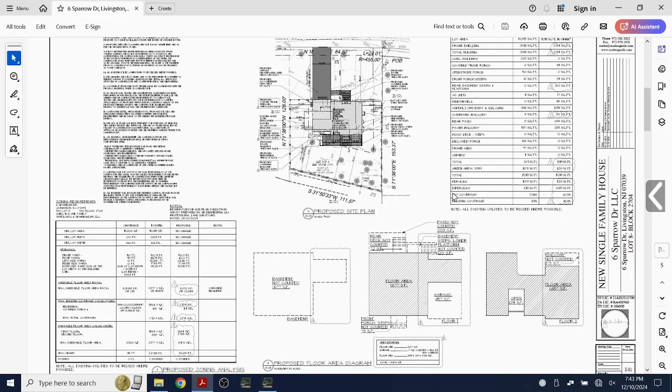The 1.69% is 258 square feet. That's all we're asking for. I'd like to mention that the 258 includes a two-story open foyer, which is counted twice, and the area for the open foyer is 129 square feet. So technically we're only asking for 129 square feet of increase toward the floor area ratio. But Livingston has a very particular ordinance, because anytime you do a grand opening, both floors count, even though there's not a physical floor, as you've heard tonight and at the 6 o'clock session.

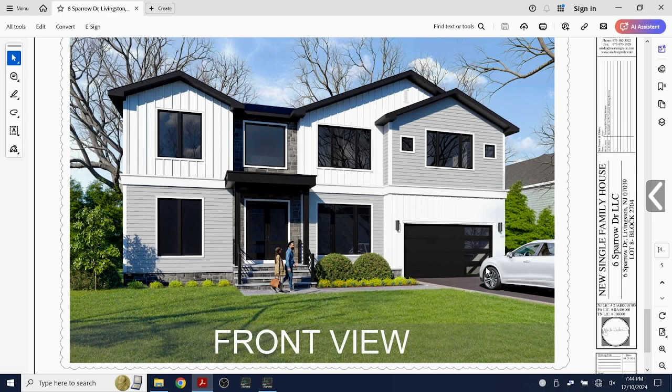And you made changes to the exterior of the property too. Yes, at the last meeting we decided to change the modern character of the building to something that can blend into this neighborhood. So we designed this now, which is the colonial style home with the stone base at the base of the building. We have stone also at the entrance and the foyer. We have horizontal board, James Hardie, and vertical board and batten on some of the walls at the second floor. Based upon the comments of members of the board and the public, we brought this into more of the neighborhood, the colonial aspects that already exist in the neighborhood. Is that correct?

Are these all of the changes from our prior presentation? These are the changes, the square footage changes involve the second floor, we reduced it by 50 square feet. The first floor didn't change much, but that's it. Just the 49 square foot reduction and the outside of the front facade. So these changes we were able to do and keep with the 7 months of planning we've done on this project. Correct.

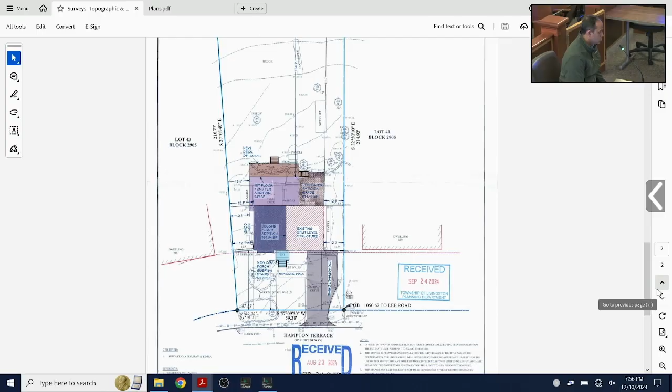Can you describe the changes you're making to the house for us? So we are doing a second floor addition on top of my, it's a split house. On top of the living room, we are doing a second floor addition. Are you expanding the house to either side or to the front? We are expanding the house to the back of the house. And by how much is that? In terms of feet further that we are going, we are going close to 25 feet, I guess.

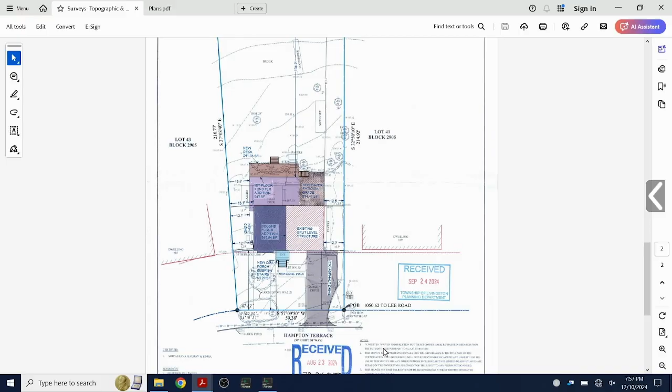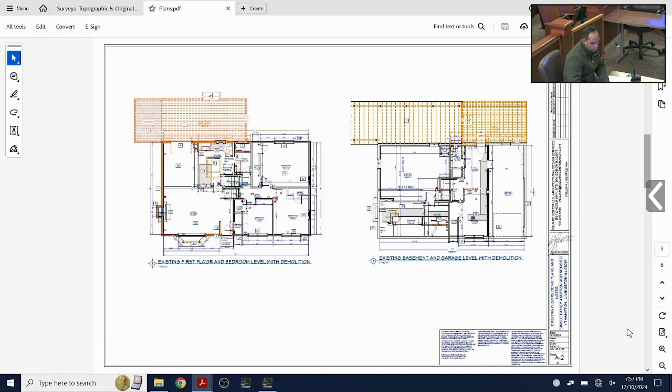His own chart says everything's fine. Yeah, but I'm just trying to figure this out, that's why I was asking. So you're building over the existing house, right? Yeah. Okay, and the variance I'm requesting is for the front yard setback. Right, so it's an existing non-conforming condition. Existing one, correct? Yes. Okay.

Is the addition within the footprint of the existing building, or are you extending it over the footprint? So yes, we are going further back, not around, going back. In which direction? To the back of the house. So there is no other variance, no area, ratio, side? It's only the front yard, which is existing, yes, non-conforming? Yes.

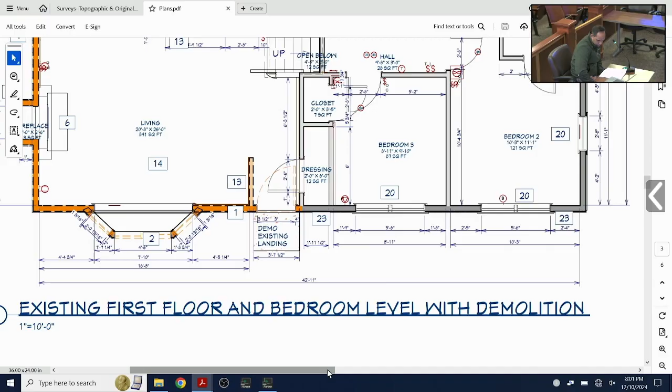Does anybody else on the board have any questions? Does anybody in the public have any questions? Does anybody in the public want to make a statement? Anybody on the board want to make a statement? Does anybody on the board want to make a motion?

So, Mr. Srivastava, you're not asking for any other variance except the front yard, which is existing non-conforming. You're building up and back. Yes. And even the bump out of the window is existing, and you're just going to have a similar window on the second floor. Yes. I've been to your street to check the property, and I see the houses in your neighborhood are redeveloped and bigger than yours. So I think it's a very modest and compliant improvement, except for the existing nonconformities. For that reason, I make a motion to approve.

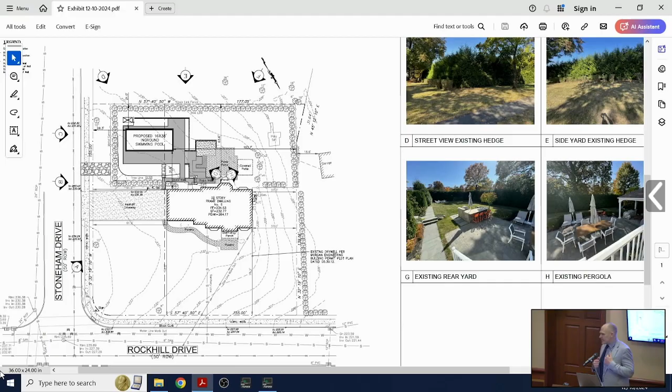I have the denial letter in my bag if you need me to read it off to you. So then you're just coming for the swimming pool setback? Correct, just the front yard setback variance for the swimming pool. Yes, those other two variances we would like to remove, since we're eliminating that screening around the filter.

So we are requesting relief from the front yard setback with respect to the swimming pool, where 60 feet is required and we are proposing 28.3 feet. The pool conforms to the rear and side yard setback requirements. There's an... let me just see, excuse me, I still have testimony here about the fence.

So from a design perspective, the pool in this location works best for the property and for the lot, because it will result in the least amount of disturbance on the property. The pool and patio will require minimal grading in this location. It'll require a small retaining wall, 2 feet or less, to allow for construction of the pool and patio. The patio will function as desired and provide access to the existing paver patio and outdoor kitchen and pavilion area in the same rear yard. No trees are proposed to be removed as a result of this project.

The stormwater will be managed in accordance with township standards. On the site plan, we have several catch basins in and around the proposed pool and pool patio area, which will capture and route all the stormwater to the catch basin on Rockhill Drive. If anybody needs to see that, I could bring up the actual site plan. So as a result of this project and the increased impervious area, there will actually be a net benefit for stormwater management on this property due to these measures we are proposing, such as the catch basins and routing the stormwater away.

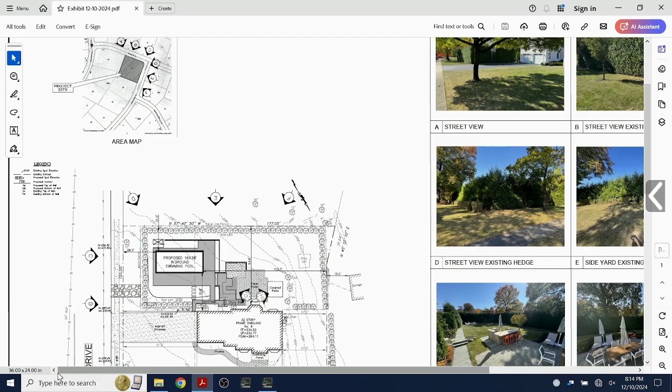So the pool in this location too, like I said, it minimizes disturbance. If we were to push it into the most western corner of the property in a conforming location, the existing paver patio and the masonry outdoor kitchen would all have to be modified and relocated. A substantial amount of soil movement would need to be done to level that western part of the property. We're talking retaining walls in excess of 4 feet, just to bring in all that dirt and level that area to have a patio and pool that match the existing patio. So from a disturbance perspective, the pool in this location works best.

And that is my testimony. I'll take any questions.

I have a question. No, I mean, I get it, I think it's thoughtful. If I read this correctly, the entire property today is screened by these large arborvitaes. So I assume, reading off of this, a degree of those will need to be taken out for the construction to occur and then be put back, is that correct? That's correct, yes. Thank you.

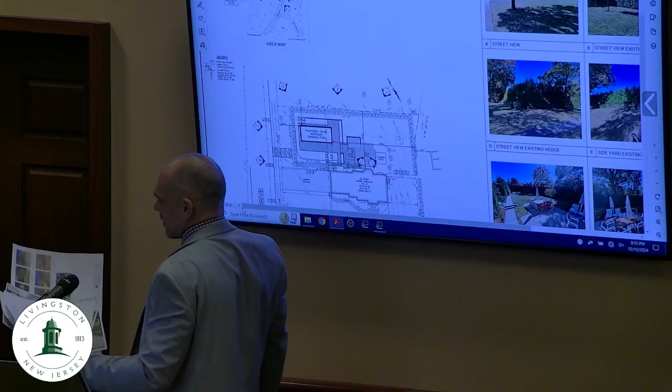Just clarification on the fence. Are you saying both fences? So we were proposing initially a small fence here around to screen the filter equipment. That was the other fence that required the variance. So the pool fence is still on here at 5 feet, asking for the 5 foot? This is an existing fence. We were only requesting a variance for the other one, which was a design feature that the designer sold them on. It was a 5-foot aluminum, modern looking shielding fence, but they decided it wasn't necessary.

Okay, and the existing fencing is adequate to protect for a swimming pool, right? It will be pool compliant. I don't believe the chain link fence in the rear has the required 2-inch spacing, so it's just going to have to be modified to have the non-climbing fence. But the fence will stay in its location and it will be conforming to the International Swimming Pool Code.

Anybody else have any questions? So this little box here, it's pool machinery? This one here? Yeah, that's the filter pad, yes. And there is a neighbor behind, on that side of the property, right? There's a neighbor, yes, a house there. Is it possible to move the machinery on the other side of the pool? Or this, on this side here? Yeah?

It can happen, I mean, anything can happen. This is the application, this is the design that we're proposing tonight.

The filter pad uses variable frequency drive pumps. They're not as noisy as everyone thinks, or as history tells us. I don't see it being a nuisance, especially with as thick of a screen as that, which can shield and dampen any noise. The green screen is absolutely impressive, great job with it.

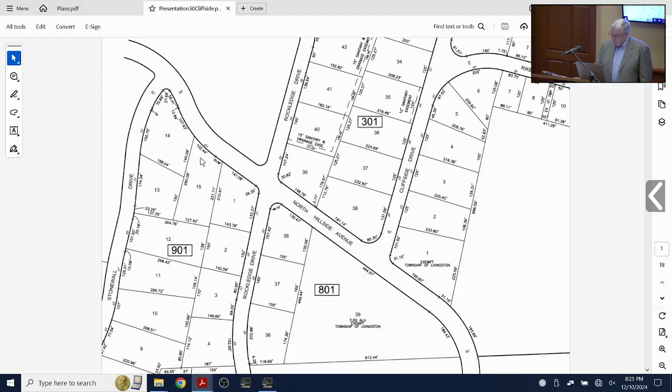We do have a correction to make. The habitable floor area that we were pursuing the D4 variance for was 5,513 square feet. After more careful measurements, it's 5,397 — a little smaller than we started. But it should be noted that it's actually going to be lower than that.

It's a bi-level house. The lowest level is a basement. It meets the definition of a basement — it's below grade at least at one point. Actually, the whole front of the house would, in other circumstances, make it a one-story house. In fact, bi-levels originally were called raised ranches.

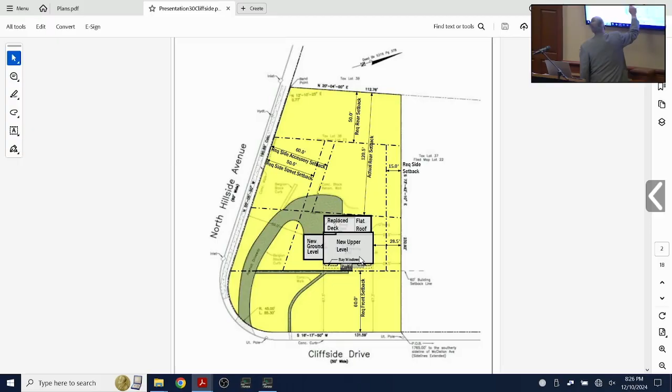It's a concrete ground floor, and once we add the second floor, our intention is to add a second floor to the main portion of the house and above the garage. The garage is on this side, and that's the main portion of the house. There's also a two-level deck in the back that's going to be leveled off.

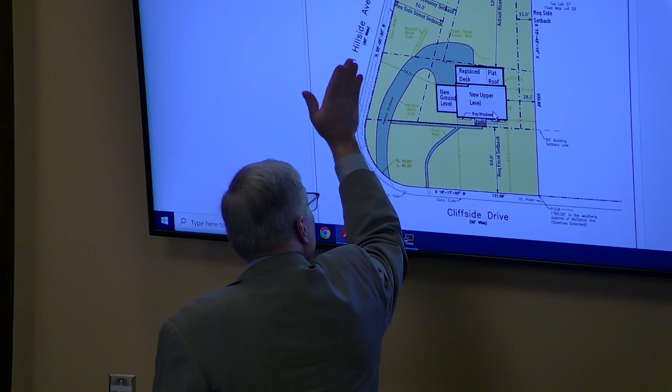A little bit about the property: there are some steep slopes, mostly up here, and some coming sideways here. There's a drainage swale here and a berm that protects the neighbors, so it's pretty well drained.

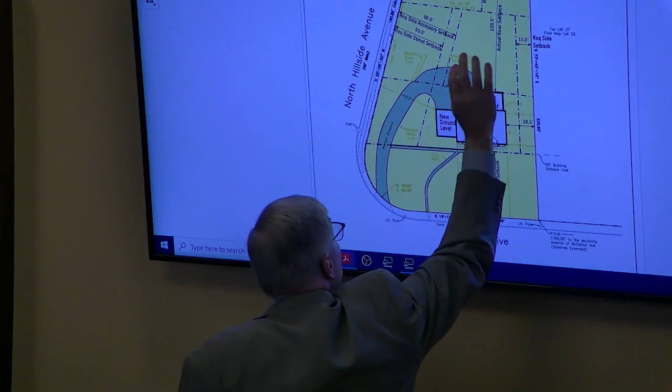The driveway takes up a lot of the back, and this is coming in close to level. Then the grade keeps increasing along here, up the back, and this whole area is 9 feet below ground level.

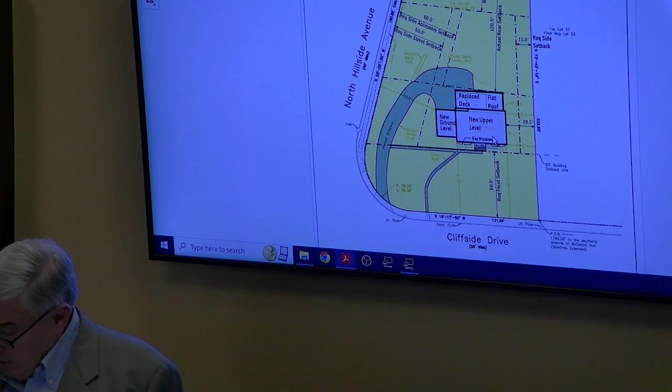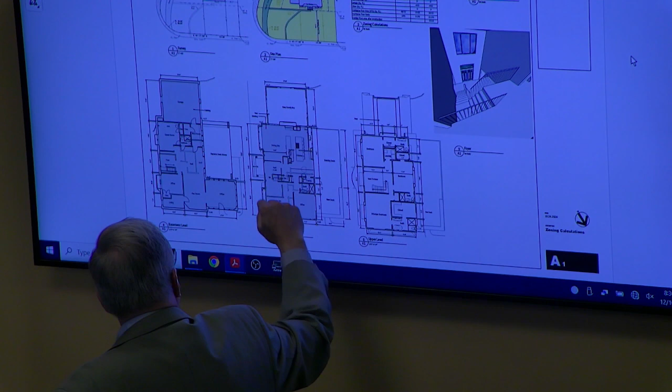The house itself — currently this is the proposed basement. It did have a small storage area here for yard equipment, but this whole area is going to be revised. A family room is going in above the garage. Other than that, it's the same square footage as the existing second floor, except for 2 bay windows and a bit of an overhang towards the back. The second floor has 3 bedrooms with en-suites, a master bath, and some closets.

The exterior — this is the exterior of the building. I'm going to go into more detail a little bit later, but actually I'm going to go in now.

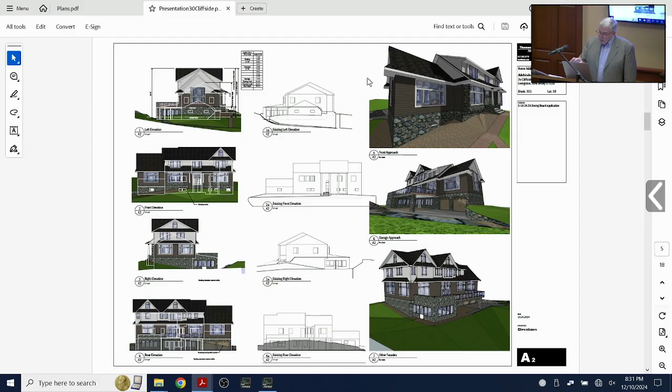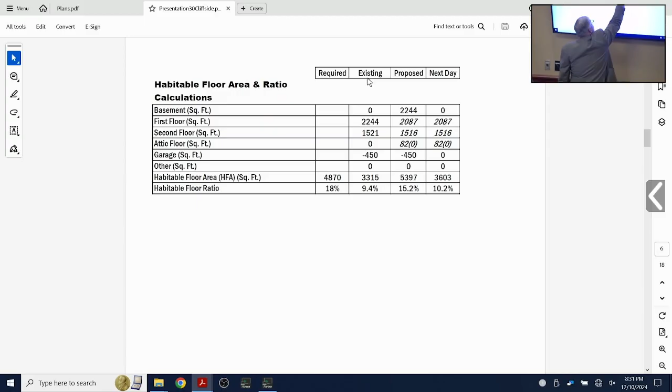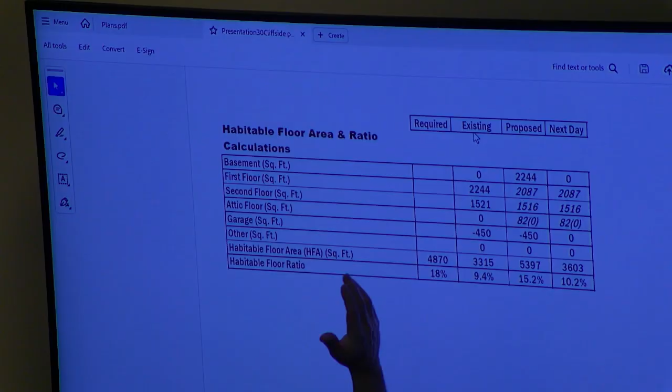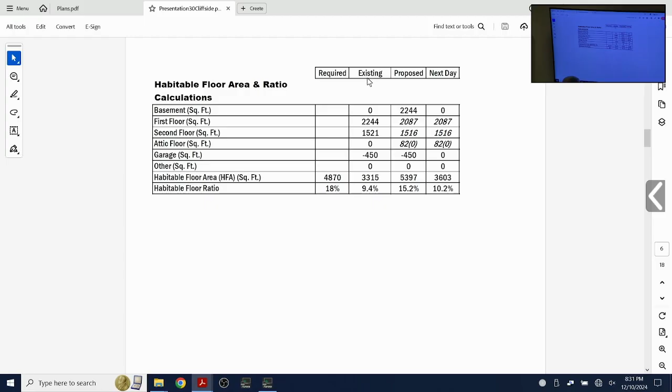These are the habitable floor areas. Just to repeat, that's the existing basement going to a basement, the first floor going to ground floor, and a new upper floor. The attic at its peak is 6'10", which translates to 82 square feet below the 6'10" level — well under the 1,500 square feet of the floor below. So it's nothing.

Mr. Singer, if you don't mind, use the microphone for me. Okay.

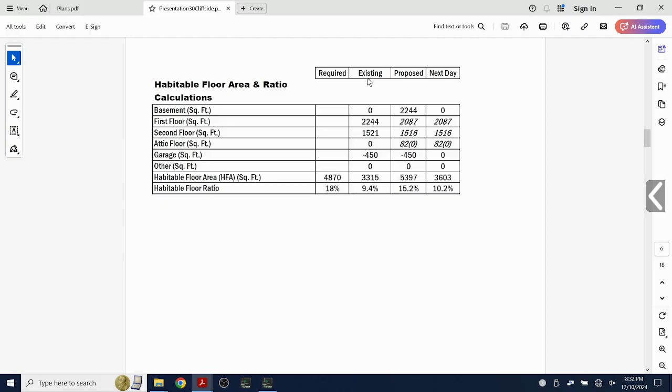And again, the ultimate square footage ends up being 10% of the habitable floor area ratio and 3,603 square feet.

Just another point here for the board members. The proposed in the last table goes higher for the variance. That's why we are requesting the variance. But after the house is built, when the basement is considered, we will be conforming. That was the point he was trying to make.

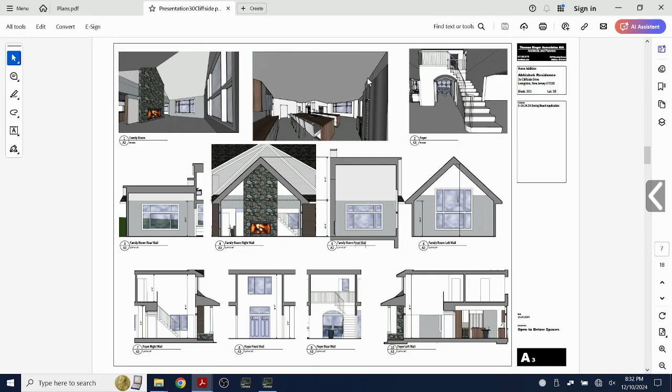So this drawing just describes the exclusions. The 2-story family room is under the limits, 10 feet at the edges, so that's considered just part of the ground floor. However, the foyer, which is 2 stories high, is counted twice.

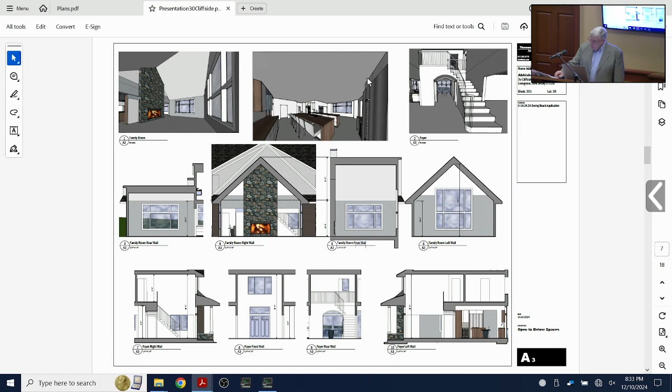So that's where we are with area. Now, height.

This is a unique site and condition because the grade line comes down to the garage and then ends up going back up. So on the low side of the house, it's actually higher than the high side of the hill. Because of that, and because the back of the house is more articulate than the front, there are 9 spot elevations that were used to determine the height.

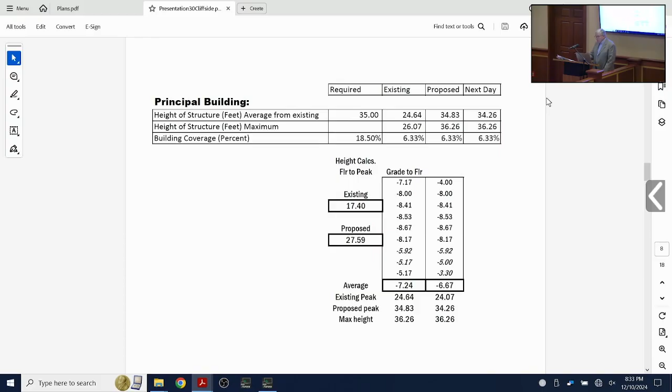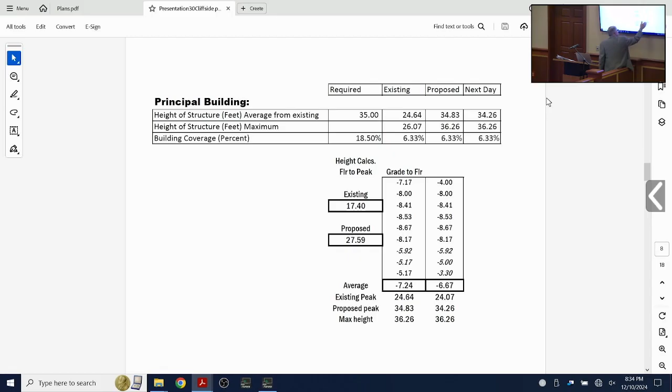Right here, actually. There are nine height calculations that we use to get the proposed peak, which is 34.83. However, we are putting something in front that changes grades a little bit, which gets about 7 inches less than the 34.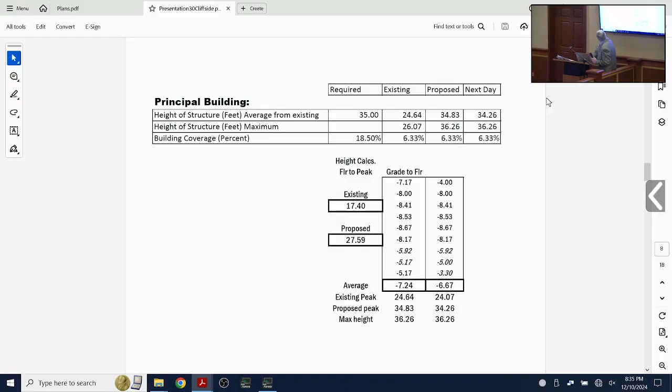Now, of those 9 points, of the 9 points, 3 of them are at the front of the house, and 6 of them are in the back. The back, which is the lowest part of the site, gets all the weight, while the 3 points in the front only get a little bit.

As a result, if you just took the 3 points in front, the overall height of the building would be 33 feet, or with the landscaping we're proposing, 31.43. The overall slope of the site is a 10% grade between the front and the back. If you were to extrapolate that line, it would end up being about 31.6 feet tall relative to natural grade before anything was built in the 1940s.

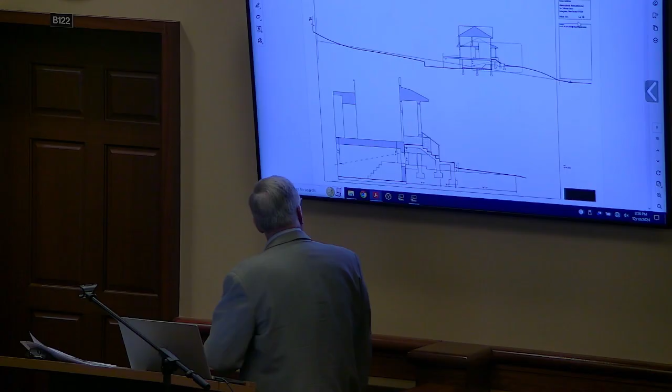The work we're doing in front: currently, this is the elevation of the front stoop and the front step. We are slightly increasing the grade here to 5%, using some structural walls to get up halfway the stairs to the first floor. So you'll be entering at the first floor. Grade is right here. That's fill underneath the stair, but this will be the final grade. There's a 16-inch seat right here, and a 1 foot 2 drop to the garden.

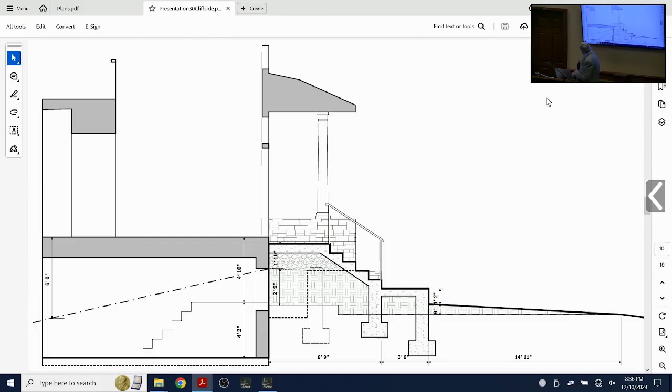That's just an enlargement. In the interest of time, since there are other hearings also planned, I'll request: essentially the variance requested is for use, for the square footage. The plans already presented to the board members elaborate what we are doing: converting the bi-level house, the ground floor being the basement, and adding a new floor on top, which will give us 3 ensuite rooms. The overall square footage, including the basement, is about 5,300 square feet. But if we count it after the house is constructed, with the ground floor as the basement, it'll be conforming at 3,800 square feet.

That was my question, actually. What is the style of the house? So you said it's a bi-level, and after it's redeveloped, it will be a colonial.

So the 2,240 that you said is the basement area being counted right now, will be basement then, so then it'll be conforming. Correct, yes. Okay, so what we were told, the denial was that because it will be non-conforming while it's being constructed, that's why we have to apply for the variance, for the use variance.

And there are no setbacks. The plot size is pretty big across, and we have ample space around on all 3 sides. It's a corner house. Right, that's what I was thinking. Why were we talking about the 2,240 basement? Okay, that clarifies a lot.

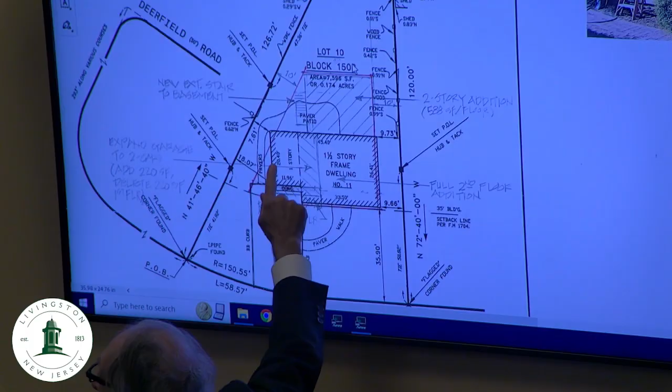So the back corner of the garage is existing, non-conforming. We're putting on a second floor over the garage and in the back as well. This is a first and second floor addition, and this is a second floor addition. We're expanding the garage, setting back the front setback a little bit to create more of a two-car garage.

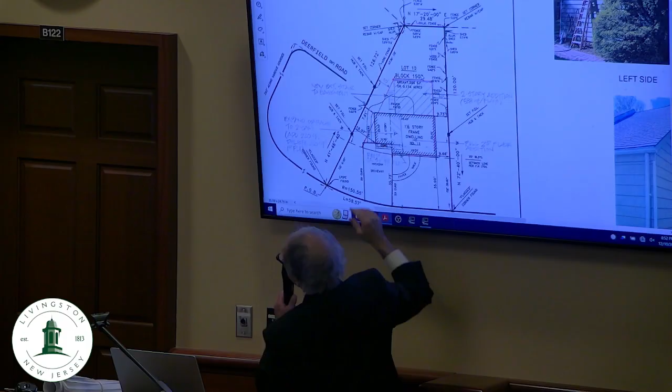The back corner on the second floor is actually a balcony. It's an open space, but for structural and visual reasons, even though it's unenclosed, it needs a variance because of the roof. If we didn't put a roof on it, it wouldn't need a variance because the addition would be literally in that back corner. So we're requesting that little corner for the addition.

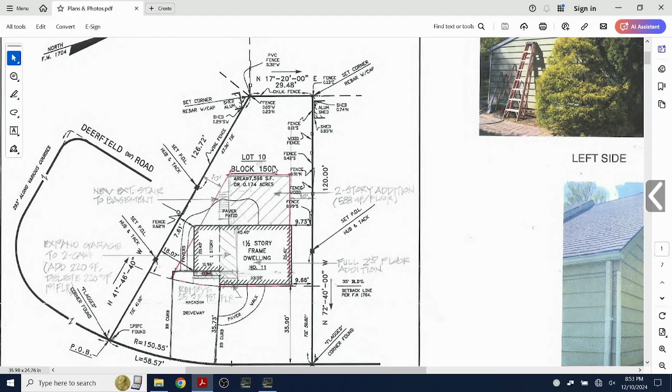Finally, the habitable floor area is required to be 30%, and it's allowed to be 3,200 square feet, 3,220, but right now it's required to be 30%, and we're at 35.5%. So we're requesting a variance of 5.5% over, which is still under the 3,200 square feet, similar to a previous applicant tonight. So those are the three applications, the three requirements.

Question, so the total square footage of the new home is 2683. Am I reading that correctly? Let me go to the chart. Yes, 2683.5. Okay, thank you.

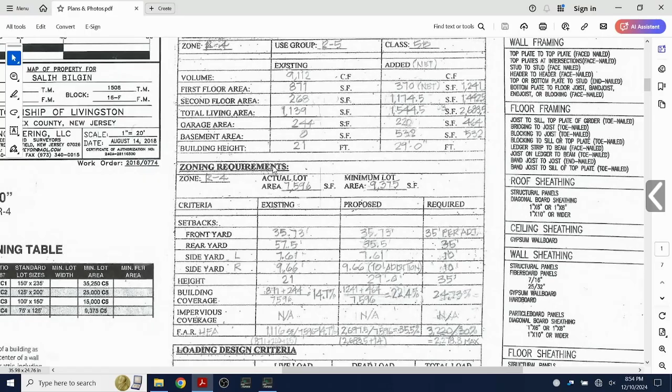For some of these variances, can you describe the hardship for us that you're up against? Well, this is an existing cape, so it's a 1.5-story house with a single car.

They've been living in it for 15 years, is that right, Sal? Yeah, since 2008. Right, and they're still continuing to live in it. One of their daughters is going to be in the upstairs room. Right now, she's in the attic, but she'll have her own room in this corner, the corner of that little corner of the garage, the upstairs. We created a suite for her. That's what she wanted, the balcony. And then that's her favorite part, the balcony.

The way we did it, we created this penthouse suite upstairs, especially at COVID time. It helped her to boost her morale. Upstairs was hers, and in the 2 rooms downstairs, we took the small room. The room in the front, in the Cape Cod, became like the guest room because my mother-in-law was visiting us. She got stuck in COVID with us over here. That was the fun part. But it was okay, we survived all together. But it helped my daughter a lot, she called that penthouse suite upstairs, and we did it great. You should have come and see, she was able to get her friends over there because that's the largest room in the house. It's okay.

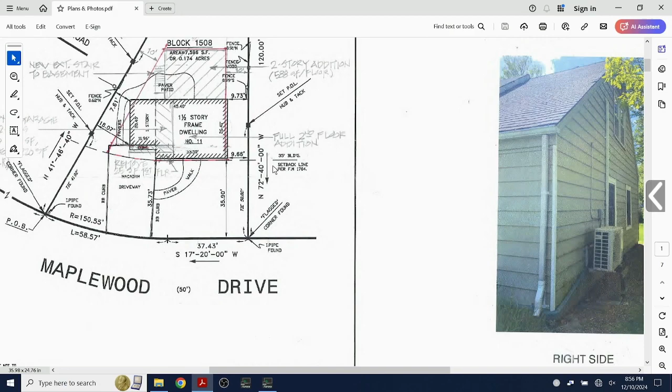The undue hardship is really the space itself is just too tight for the family, because there's really no real second floor. It's all eaves, and they needed space for like a family room and to live in it. The other houses around this one have all been upsized. They're not McMansions, this one's the same width. It's not going to take over the property. As a matter of fact, the garage is set back a little further, so I think that's probably a plus. So it's not a snout house.

And you say you're building straight up? Yeah, and within the setback for the addition. We had 2 options. We wanted to save and build in our own town. We like our town. Yes, taxes are high, this, that, but we love this town. Even though my daughter graduated, I don't care about the school system, I don't need the school system, but I need this town. I need these people, I like to walk in this street. So that's why I would like to invest in my town instead of leaving my town.

That's what it is. So this is also an undersized lot. If it was a regular R4, you wouldn't require the floor area ratio variance, right? Yeah, the real problem is the left side yard is at an acute angle, and that creates issues. If it was perhaps straighter, it might not have even been anything to discuss. Undersized lot, you're building directly over the existing house. Yes. Right.

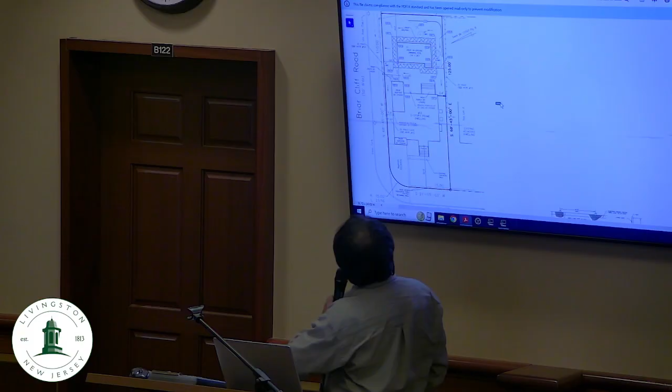Okay, so I guess I get the mic. So we are proposing a 14 by 28 in-ground swimming pool, which is a pretty modest size, and we will need a variance for the side setback on this side. 20 feet is required, we're proposing 10 feet. For the front side setback, also a 20-foot requirement, we're proposing 12 feet.

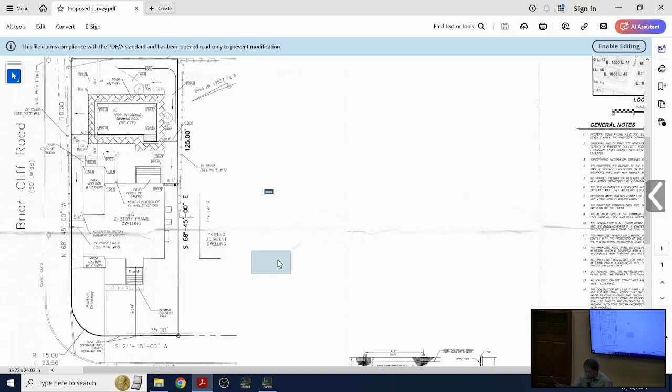We also require a variance for the pool rear yard coverage of 14.7%. So this property is an existing undersized lot. In terms of area, the requirement is 9,375 square feet, and we have 6,202 square feet. The lot width is also existing non-conforming; it's existing 50 feet wide and requires 75 feet.

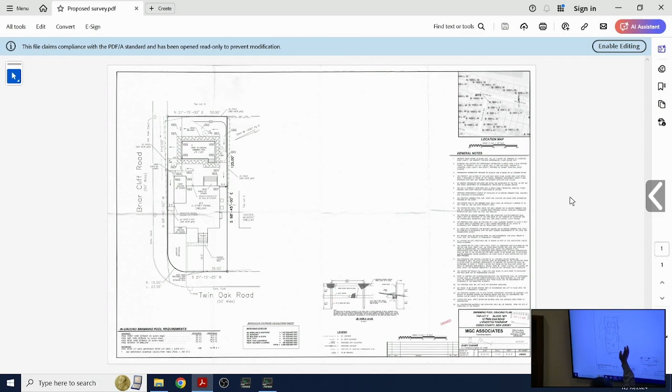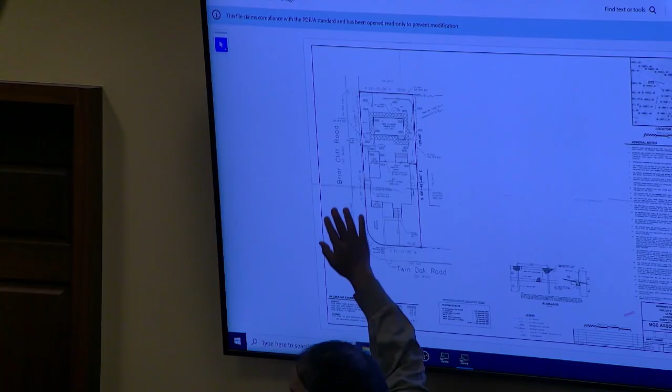So if we were going to put this pool in a conforming lot, we would not actually need any of these variances. Right now, the topography drains from the upper right down to the road, so there will be no impact on the neighbor, and it's going to continue to flow in the same direction. We have a 6-foot fence on the right, a 6-foot fence on the rear, and a 4-foot fence on Briar Cliff Road. Our property is also about 8 to 10 feet higher than Briar Cliff Road, so it's kind of like a natural buffer screening it from the road out there. Again, because of the unique size of the property, we're requesting these variances.

Does anybody on the board have any questions for this witness?

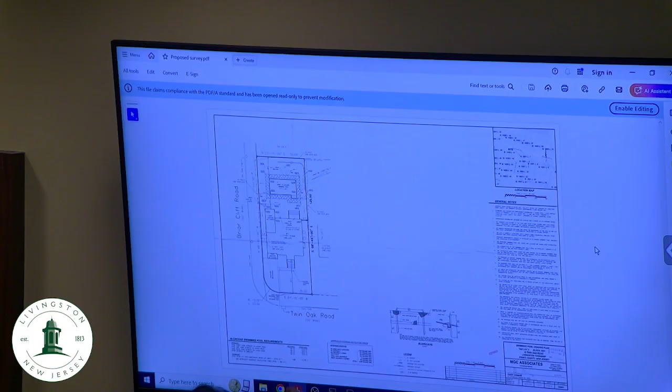Where does the pool equipment, the machine, go? We were planning to put it right here, on the side. There's a 6-foot fence here already, so it will already be screened from the neighbor.

It's not labeled. So I have a question - the photos we received, the house doesn't look like this anymore, right? It's under construction, correct, so every day it's going to look different. And it's hard to see in the back because there's materials there now, but it's not a particularly large backyard.

I understand the need to want a pool, I totally get it, it's a small backyard. Why did you just not choose to make a smaller pool and not come in front of the board? What's the real hardship? Well, no matter what size, we would have a setback issue. It's 20 feet, but that is on the smaller side. Anything smaller just wouldn't make sense.

The pool that we're proposing is a pretty small pool to begin with. And you can't move the fence because it's right at the top of where the hill is going down, so you can't move it out anymore.

That's our property line, even though we have additional space beyond the survey - that's not ours. The property line ends where the fence is. So we do have additional space beyond the survey, that's most likely the town's, but it's not our property. Right, and it's not usable anyway.

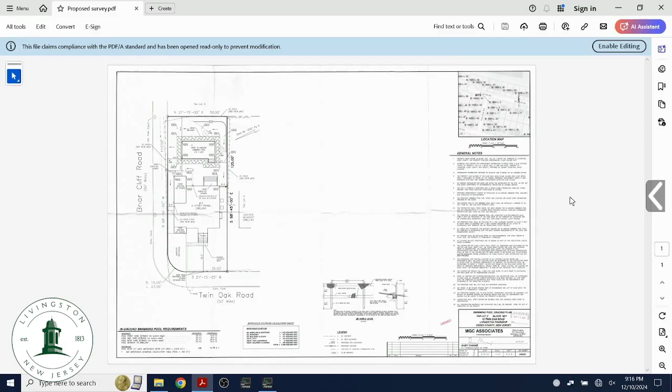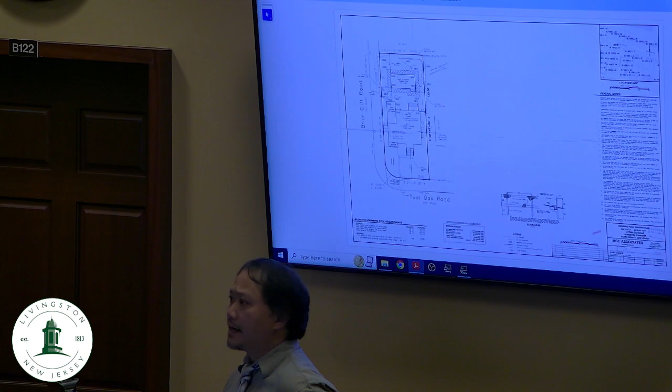And I guess 6 to 8 foot as they come? Yeah, 6 feet, 6 feet minimum. 5 foot spacing on that whole row, they grow quickly, they grow fast, the green giants.

Arborvitaes on one side will be good for privacy, but on the back and the other side where the neighbors are, there's already a 6-foot high fence. There's a fence on the back and on the side where our only neighbor is. The fence in the back is actually their front yard, since it's a corner lot, not their backyard, but there's a 6-foot fence there.

But I still feel a few greens over there would help. It will make your backyard look prettier, and also benefit the neighbors on the side and the back. It'll be a green wall, since the trees will be taller than the fence, so it'll be nicer from an aesthetic point of view.

So then we're putting them on all 3 sides? Is that what I'm hearing? Did you say 3 sides or 2 sides? They're saying 3, I think. So the front, the side, and the back, right? Right, definitely the front and the side. I think everyone's nodding on all 3 sides. So all 3 sides, green giant arborvitae, 6 foot minimum height, 5 foot spacing?

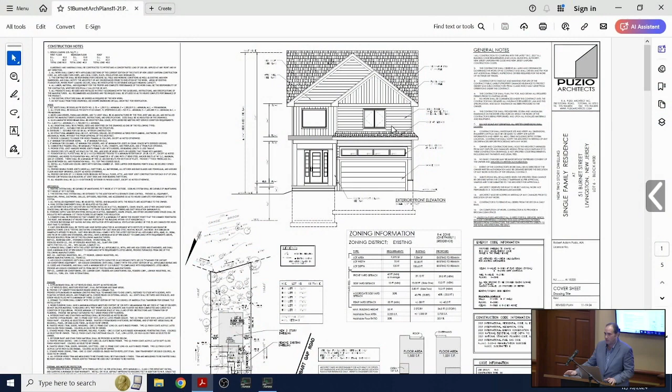Certainly. First, I'll go through the architectural plans, highlighting the proposed floor plans and elevations for the single-family dwelling. As Mr. Posada indicated, it will replace an existing dwelling. Here you have the front facade, front entry, 2-car garage, windows for the bedroom program that is on the second floor.

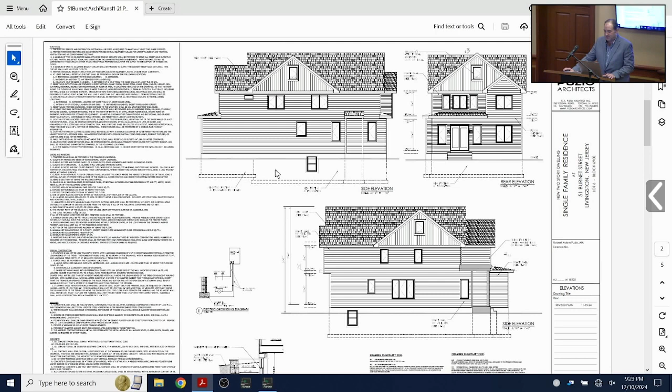Here are the other 3 elevations. You have the 2 side elevations with ample fenestration, so you're not dealing with any blank wall situation. Similar to the rear elevation where you have windows for the various rooms as well as access to the rear yard. I would like to note that the siding material is high-quality HardiePlank siding.

It is not vinyl, so that will be a very attractive facade. Moving on to the floor plans, here you have the basement plan where the majority of the basement is an open recreation room, as well as a small bedroom and bathroom in the basement. Moving to the first floor, you have an attached two-car garage, as well as an open kitchen, dining, and family room area. There's additionally a guest room with an ensuite bathroom. I would like to note that this is a pretty modest-sized dwelling. The first floor living space plan is approximately 600 square feet for the family room and guest room, and then the kitchen and the mudroom balances out the habitable floor area of that floor.

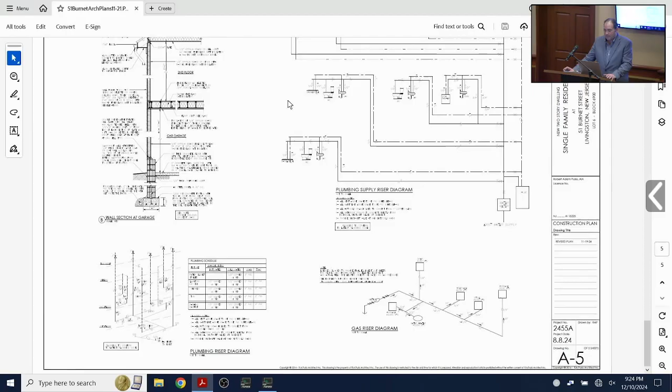I'd like to highlight that the only access to the attic is through the pull-down stair in the second floor hallway. With relation to this staircase here, this is an open foyer, so there's no access for the stairs to get to the attic. So everything will be through the pull-down stair in the hallway. And therefore, the attic cannot be habitable? The attic will not be habitable. Thank you.

So that concludes the program for the proposed dwelling.

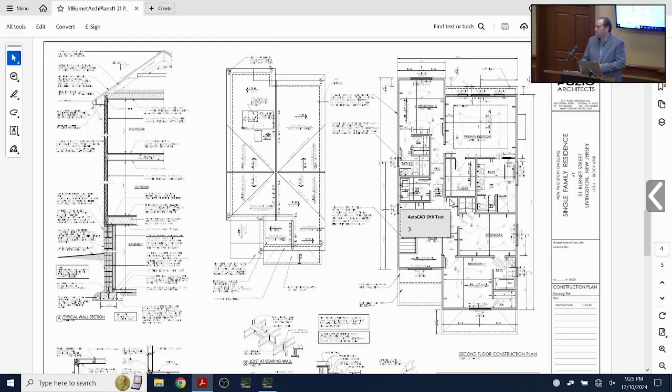Okay, so the front yard is existing non-conforming. I'm going to get into the planning testimony in just a moment, but yes, that is true. The front yard is existing non-conforming at 29.1, whereas the new proposal will have it at 39 feet, whereas 40 feet is required. So we're going from an 11-foot to a 1-foot variance. There are other variances that are eliminated with this application, and I'll get into them.

Does anybody have any questions regarding the architecture of the house? Please step forward. Your name and address. Pascal Marinello, 53 Burnet Street, Livingston.

A couple of questions I had. If you could first scroll back to the front elevation. The front elevation shows the main roof front to back, but then when you show the side elevations, they go side to side. So if you look at the main roof...

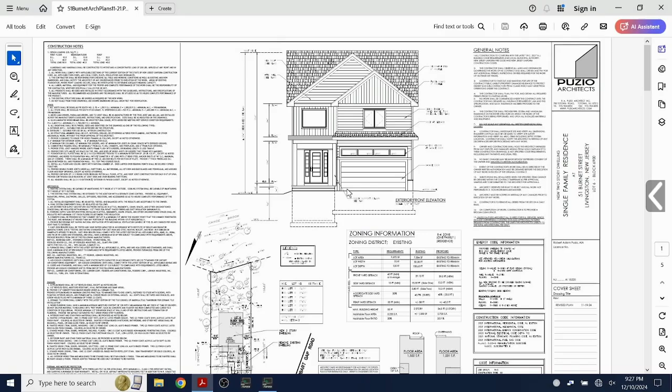There are dormers in the roof, it doesn't just simply go front to back. The applicant added roof definition so it isn't just a large expanse of asphalt shingles. That's why you see this triangular area here on the roof, and this one. The applicant didn't want a roof without definition, so it added variation to the roof scheme.

Okay, understood. I noticed on your plan that you're going to salvage the garage foundation and footings. With all the demolition, you're knocking the whole house down, so why would you, or how do you do that? There's a reason I'm asking, because I saw notes that said they were going to preserve the existing garage foundation and footing, and that area is next to my property, so I was curious.

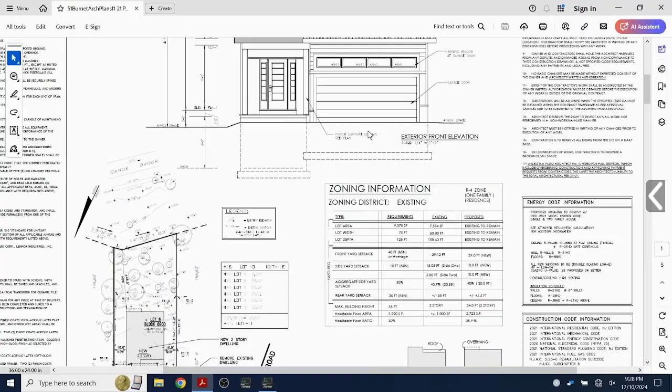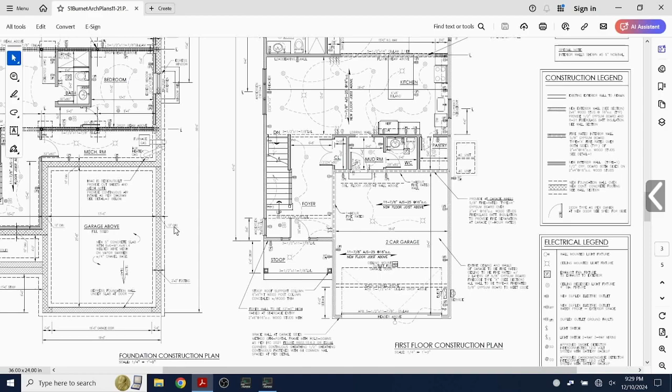No, the applicant is proposing a new foundation for the garage. Okay, because the notes I had when I reviewed the plans at town hall said otherwise. The applicant is building a new house here. Yes, I realized that—in fact I saw everything else was being demoed, but there was a specific subnote on the plans regarding that, and I didn't know if it was being left to grandfather something in.

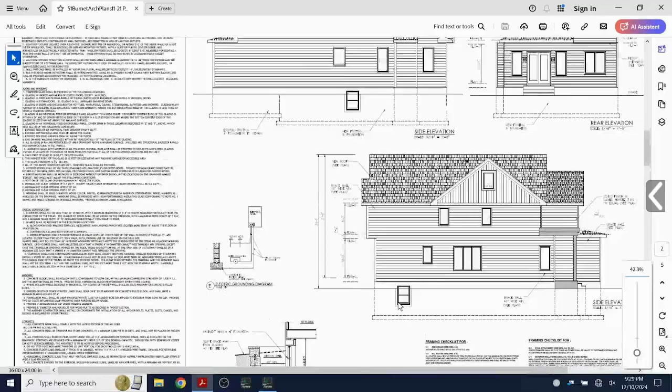On the side elevation, on A2, I think that's the note the resident is referring to, on the left side of the side elevation. Up a little, at the top of the screen. Now it's in the middle. Dead center. It reads: existing footing and foundation to remain. Okay, we'll get that corrected.

One of my concerns, since I'm the property right next door, is the drainage. Is there going to be underground drainage? Is it going to go to the backyard, or down their driveway?

I can actually answer that question. As far as drainage goes for this application, it's not actually part of the board's jurisdiction. Nevertheless, it is part of the overall approvals needed to issue building permits. If this board finds favorably, the next step would be submitting a lot surface drainage report to the township's engineer. Pursuant to their review of any runoff or stormwater mitigation issues, the township engineer will recommend improvements—and those aren't really recommendations, they're directions we'd have to follow and install. Absent doing that, we wouldn't be able to get construction permits.

Let me ask you, since you're in the construction phase—in a typical house like this, would the gutters come to downspouts and the downspouts go underground, as opposed to just draining to the side of the house? Submitted with the application, the applicant's engineering plan shows subsurface drainage in the rear yard which the roof leaders will be connected to. And the front part, obviously, will be one 60-foot-long gutter—would the front downspouts be led to the back of the house also?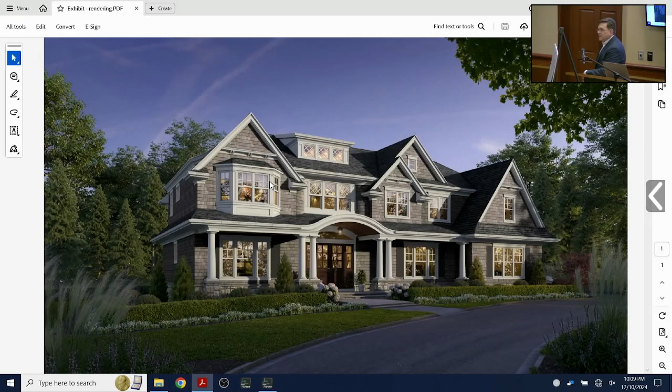My clients, Andy and Rebecca, hired me to design a new home for their family. They have 3 kids, and their requested intent was to have a 4-bedroom, second-floor house for their 3 kids and themselves. Rebecca's parents live out of state, so they wanted a guest bedroom for them as well, which we provided on the first floor. Essentially, they hired me to design a house to meet their needs based on their programmatic requirements - that's why it's triggering some of these variances. But the intent of the design and the character of the home, with the assistance of my clients, was to create a very charming, timeless, elegant shingle-style home - something that would contribute in a really positive way to the character of the town.

We are proposing a product called new cedar siding, which is a composite siding. The color is called worldly gray, and it comes in 3 different hues: a light gray, a medium gray, and a dark gray. You're actually ordering it in one color, but it comes in boxes within 3 hues, and it gives it this really wonderful, realistic effect of semi-translucent stained siding. It's beautiful.

The windows, we're exploring the possibility of Marvin windows, Kolbe windows, or Andersen windows. They're going to be true simulated divided lights.

The character of the house, we wanted it to be understated elegant. We were not trying to create anything ostentatious or assuming. We have roof lines that come down with skirt roof, and the roof line over the garage on the right side of the house comes down to the first floor. Skirt roof to create the essence of a house that's evoking a sense of humbleness, so that when you drive by it, you know this is the personality of the homeowners. They're humble in nature because their house does not have that in-your-face look. It's charming character.

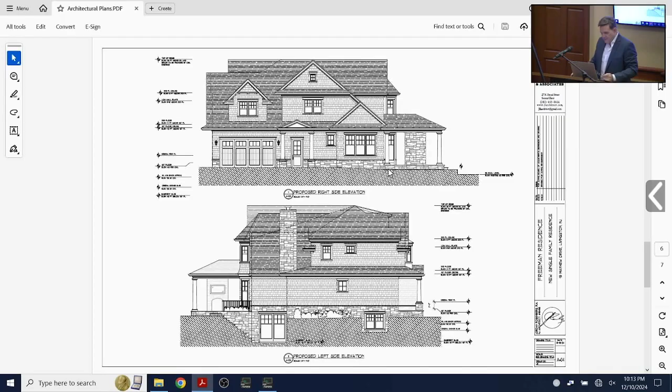So the front of the house, as you can see, the rendering better depicts it than the 2-dimensional architectural elevations. The back of the house is represented below it. It has a covered veranda at the back, clean lines. And then there's 2 side elevations here. It's a side-loading garage. The garages are hidden from the front of the house.

The existing house, which is a brick colonial from the 1960s, is being demolished. It has a 2-car garage on the left side, at a basement level or garage. We're moving the garage to the right side of the house so it could be entered or accessed from the first floor, and it's just a cleaner look.

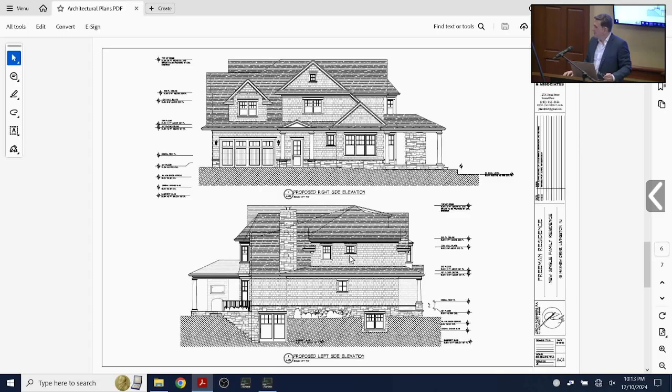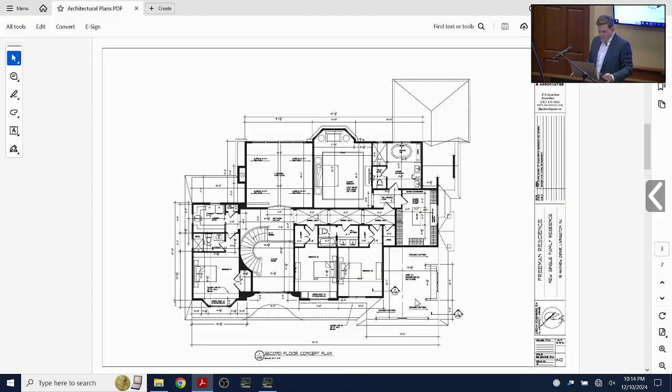And that's our roof plan, just conceptual in nature, but accurate. Regarding building height, yes, so we comply with building height. It's a pull-down hatch to access the attic, and it's a non-habitable attic. It's important to note that the 2-car garage does not have any attic above it. There's no ceiling on the two-car garage, it's open, a lofted kind of garage.

So real quick, let's go back to the foyer. As you noted on the record, it is essentially double counted. Can you please advise this board of approximately what the square footage is of that foyer that's double counted? Sure.

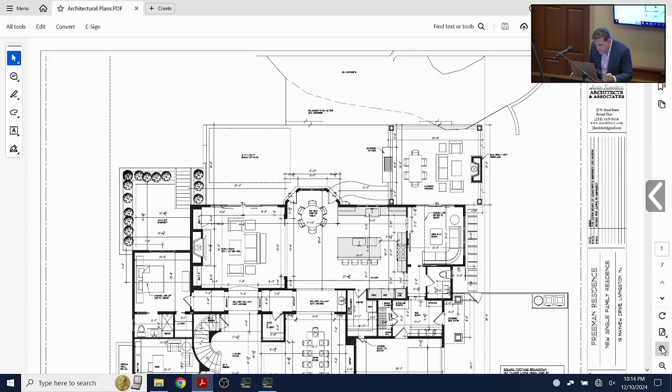So the foyer is 12 foot 1.5 by 18 foot 2.5. So let's just say 12.1 times 18.1, and of course it's going to be 10% larger than that because I'm not including the staircase, but staircases exist in all houses, not two-story spaces. Okay, so it's about 219 square feet? Yes, sir. Okay, thank you.

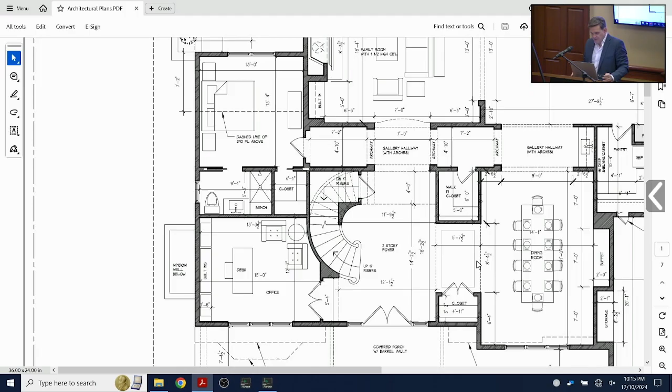I have no further questions for this witness. Does anybody on the board have any questions for this witness?

I got one. Do you know what the height is of the attic? To the underside of the attic structure is 6 feet 11 inches, because that's what I set my collar ties at. The collar ties are an essential structural element of this rigid A-frame roof design. So technically, when you pull down the hatch and go up to the attic, every collar tie at 16 inches on center, which will be 2x8 collar ties, will be set at 6 feet 11 inches.

Anybody else have any questions? And to clarify, in the garage we're not going to come back and add any joists, it's going to stay open, correct? The attic is a pull-down. Pull down also? Yes, okay.

Does anybody in the public have any questions for this witness?

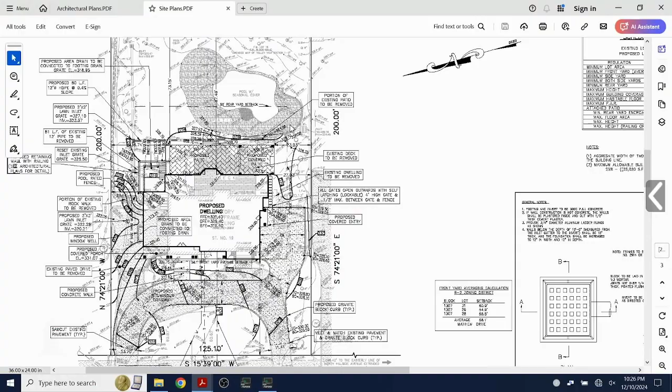Are we able to pull this out? Yeah, need some help from the man behind the curtain? Sorry, I was taking a nap.

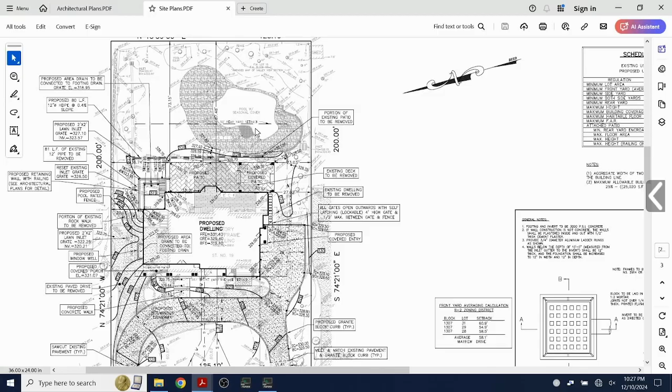Okay, so that's the proposed dwelling. If you can go down to the next page, the existing dwelling. Right. So right now, as things stand, if you can zoom in a little bit, that's a little far out. There is, to the right of the pool there, an inlet that's several feet by several feet. As things stand right now, there is a pipe that's running under the patio all the way to my side of the property. And it connects with an existing pipe that allows stormwater to drain towards the street. And there's a drainage easement running across the front of my property.

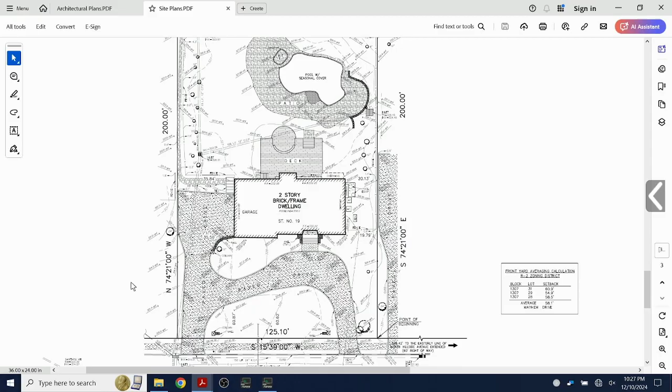In the applicant's initial proposal, he cannot keep that pipe running from the right to the left because he's building there. So instead the proposal was to move that a few feet past the patio towards the pool. I don't think that makes a lot of sense. I think it has the potential to cause drainage issues in the future.

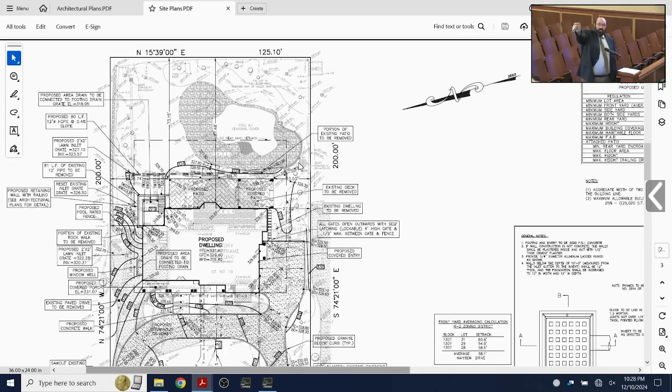So my recommendation was a conditional approval with the requirement that instead of reconstructing that pipe that runs towards my side of the property, instead horizontally dig and install a pipe that allows the water to drain from that inlet on the right side of the pool, directly towards the street, connecting into the existing groundwater management system there.

One of the reasons we strongly support this application is that the driveway on my side of the property is being entirely uprooted and replaced with grass. In terms of stormwater management concerns, that's a really big improvement. And we're also very happy that the garage is going on the other side of the property, essentially.

I do have to say, you may consider this or not - in court we'd call it hearsay. I spoke to the owner of 21 Mayhew, on the other side, and he indicated he has no opposition whatsoever. He's traveling, otherwise he would be here tonight also in strong support, I believe, of the application. That's hearsay, though. Right, so if nobody objects, it can be considered. But anyway, that's a rule of evidence - what can I tell you?

Generally speaking, there are a couple of inlets being proposed to be installed on my side of the property. All this, together with the pipe I propose to run on the other side of the property, I think will certainly do enough for stormwater management and alleviate any concerns moving forward. Again, we strongly support the application with that one modification.

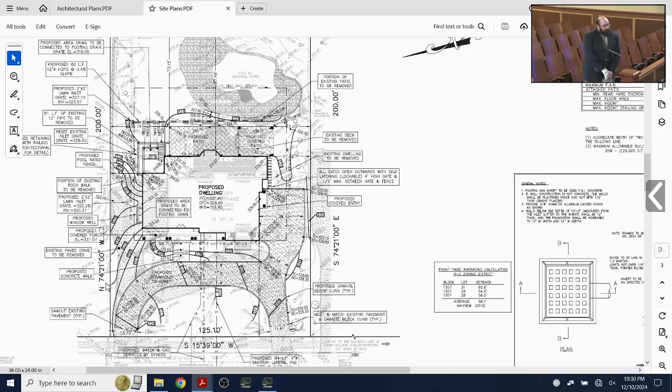Thank you. We really don't have the purview to make a stormwater management decision at this time. The engineering department from the township will require a full study, so that no additional water can travel to any of the neighbors' properties after construction. So you are covered. It's probably a good idea, what you thought of, but that might not be the optimal engineering solution - that has to be designed.

Thank you for your comments. Have you seen the township engineer's report on this? I have not seen it. I'll give you my copy - he addresses the same issues you do, so maybe you want to talk to him about what they actually think. I spoke with the assistant township engineer today, but I'm happy to pick it back up.

And the last paragraph there - just to reiterate, as I said in the opening of this matter, we do agree as a condition of approval to jet the existing pipes to confirm that there is no blockage.

Thank you very much. No, thank you for your testimony. Do you want to have a closing statement? At 10:30? No, okay, good. You didn't want one at 7:30 either, so it's okay. Or 6:30. Or 6:30, yeah.

Would anybody like to make a statement on the board? I'll make a statement - I walk that area a lot, and I think I've seen the applicant over there too, a couple times with this Rivian. It's a pretty good neighborhood, and I go up and down, and it'll definitely enhance the neighborhood over there, because right now the house is kind of dark and dull. It'll brighten it up, so yeah, good. It'll make a big improvement.